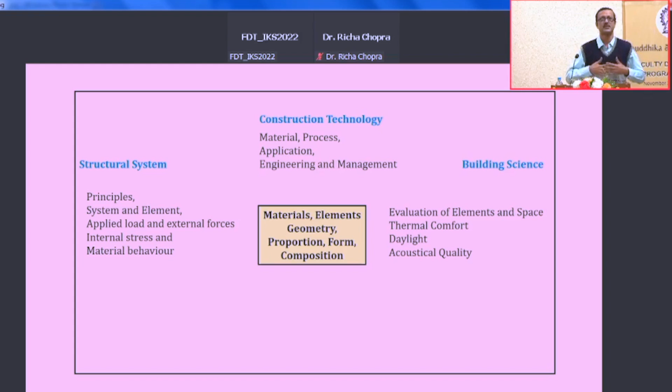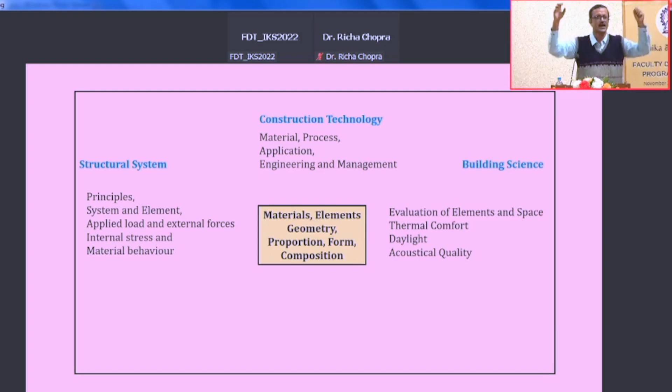It's a big temple, so there is a huge footfall, so you have to take care of the crowd, so you have to have larger openings, and how the stone can rest on those larger openings. So all of this comes under the part of structural systems.

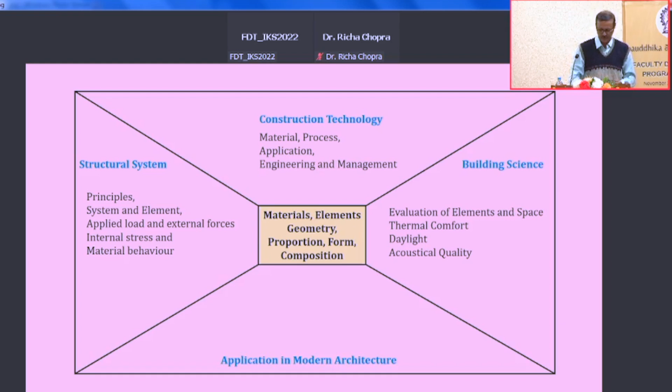What we see today, if you derive it, is just some kind of a derivative of that, a lesson from the past. Of course, there are a lot of things we have imparted into it. There are some new materials that have come into the picture. They are questionable.

Because nowadays, in recent times, around 10 years or so, we are talking about carbon free and sustainability, because we have hampered things in the last 150 years or so. After the industrial revolution, we exploited things in such a way, and of course there is population pressure and all. But due to that, there was suddenly a need to again go back to the future.

And the future is, go back to the past, sorry. And this future will actually, what I feel, is going to evolve with whatever we have generated in our past.

Of course, Government of India has recently initiated some good schemes, which Professor Joyson has just now told. We are in a middle phase of implementing bamboo as a building material in this area, where the northeast and this part of Bengal, and maybe Odisha, where bamboo is very, very available. So how can we use bamboo for materials, that is what we are doing.

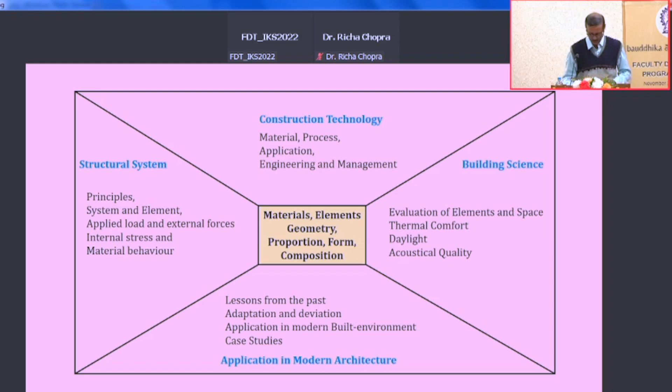So I just now told that there is the material, it has a process, it has the application. With this particular triangle, we have to actually go with the engineering and management. But what I will actually deal with today is these four segments of the Indian Knowledge System in construction practice, the Nirman. And these four are the applicable areas.

Probably I can think of this as a kind of thought area, or the thinkers that actually guide us in a particular way. One is material sensitive construction, how they actually use the material for construction, and the best material is used for the best purpose.

That is the sustainability. Next one is structure sensitive construction, that when I evolve a new type of building to construct, or any kind of object to construct, I have to think about how this structure can be held.

Climate sensitive, it is always there. When the human being entered into a cave, the home is a cave. It is climate sensitive, particularly, and also protection from the wild animals. So this is the very first one, I should actually write it as maybe the first, but this is the very first one.

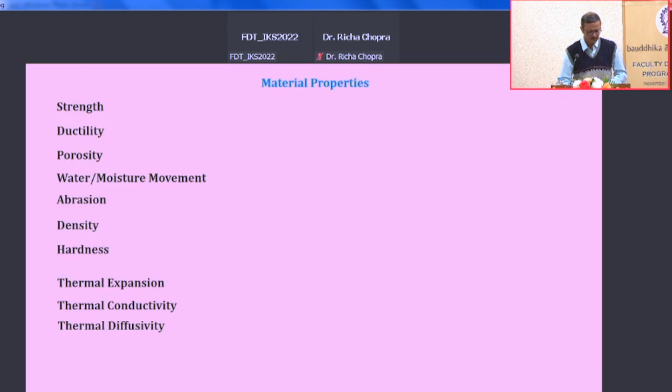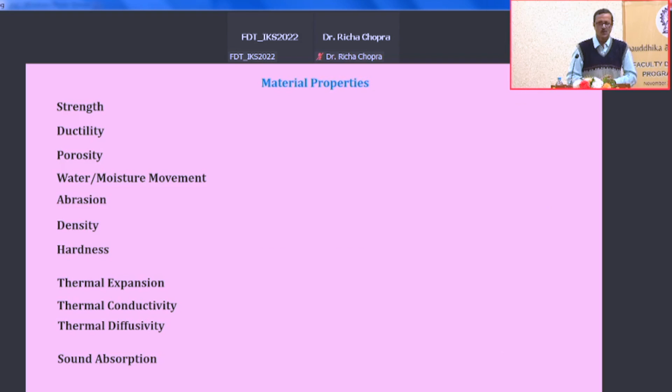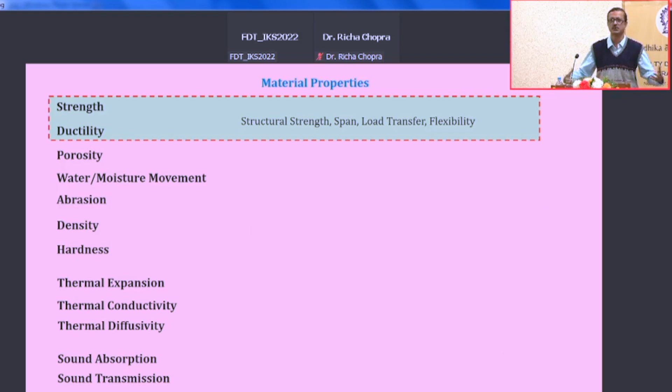These are the typical parameters that in modern times we say: what is the density of the material, what is the strength, tensile strength, and so on. These are actually taken care of in the domain, and we will see that strength and ductility have been used for the structure sensitive areas where there is a span, and a huge amount of loading and all. This porosity, water absorption, those actually factor into the durability, life cycle of materials, and maintenance point of view.

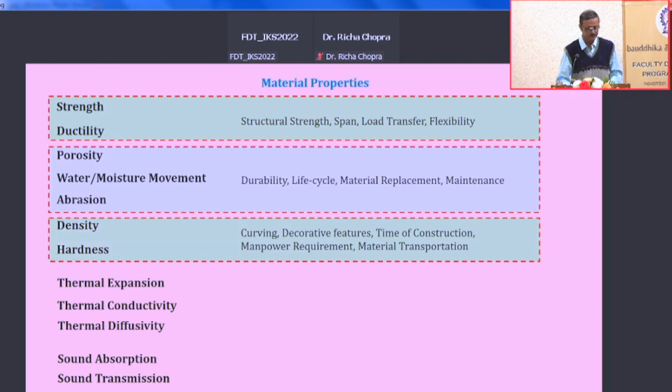The density and the hardness, if you see all the temple architecture, the carvings and all, they have chosen those kinds of stones from the density and hardness point of view.

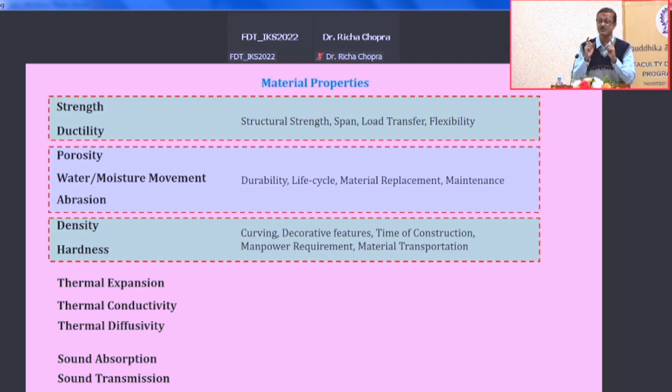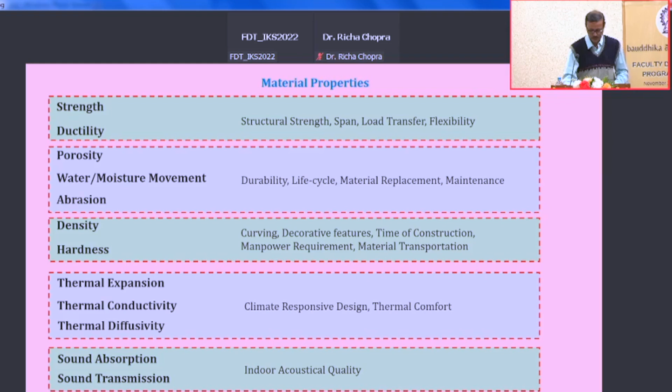From the point of view of the decorative features and also the time of construction, the total project time, manpower requirement, and those kinds of things. The thermal expansion, the thermal conductivity, etc. has taken care of the climate-sensitive part, and those include indoor acoustical quality. If you see the palaces of Rajputana, I mean Rajasthan and all, they have also imparted those kinds of properties, they have influence of those properties.

So in the Vedic period, if you see, in nutshell, in that particular era, the quality of the housing is the measure of the development. It was since then that we have actually imparted that the quality of housing is a measure of development.

There are a lot of Vedas, particularly the Atharva Veda, which actually gives some kind of insight. I must say I am still a learner, and this is a huge subject. The one biggest lack in me is that I do not know Sanskrit, because by virtue of my education I was not allowed to learn that particular subject. In my school days, there was no option to take that particular subject, so that is one of the biggest difficulties. But hopefully, with the things I am still learning, I can see what is taken there and bring that forward. So those are the signs, the Sthapatya Kala and all - those were still there.

Now if I see the housing character of the early Vedic period, basically it was started with a circular manner. The circular manner - why?

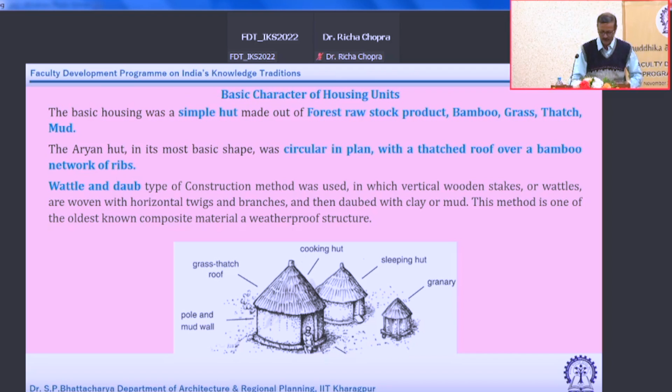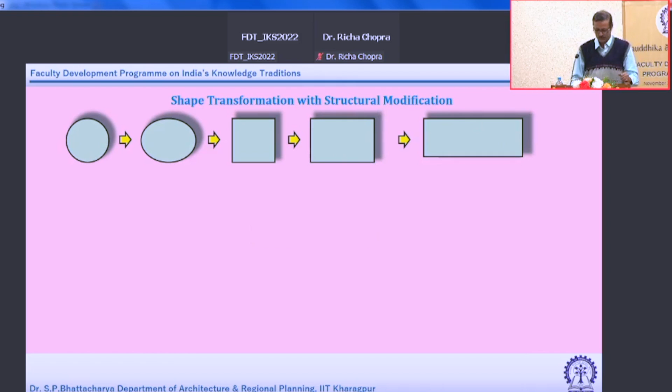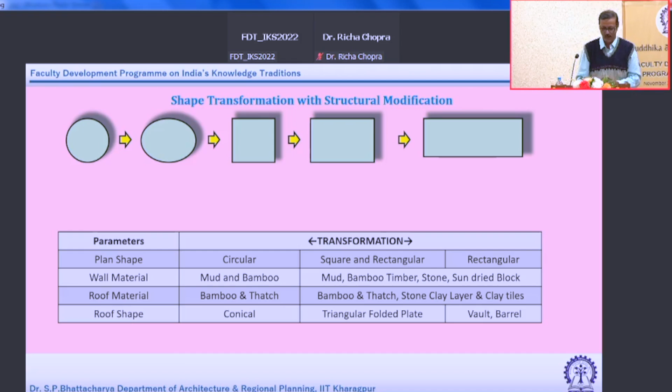They start with a circular plan, a circular plan with a conical shape with thatched bamboo and all, and then gradually they go for shape modification. So the circle has some disadvantage also from the internal point of view. Not only in India, if you go anywhere, go to the African civilizations and all, they started with a circle and then gradually compartmentalized the circle into different room forms and so on. The central portion is their kitchen or something like that.

So in India also it was gradually formed like that, and gradually it has come down to this kind of a shape - square, rectangle, and the deep rectangle. And by virtue of this, over time there were changes - instead of the conical or spherical roof, conical to spherical roof. Spherical, when it comes to a particular rectangular shape, has extended, making a kind of cylindrical roof.

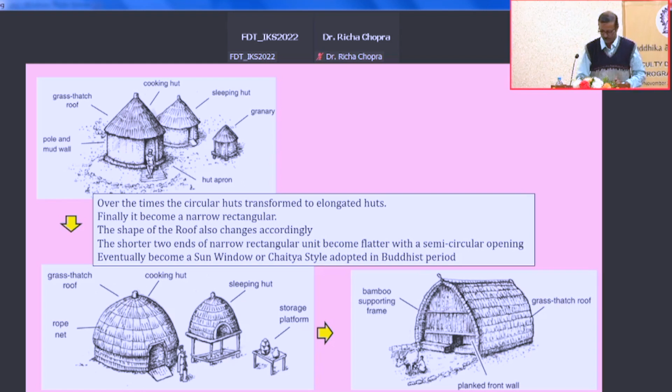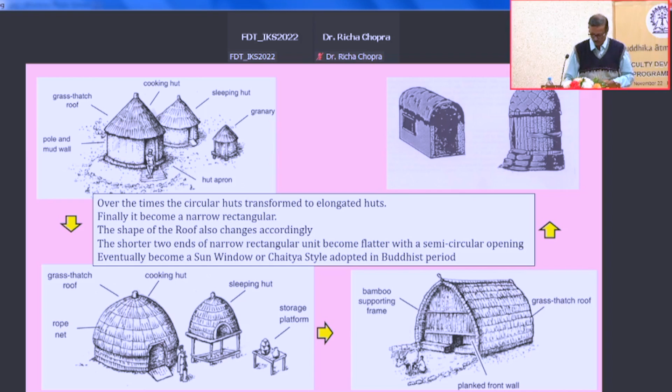This cylindrical kind of roof, when it was developed, can be seen as one of the creations of Buddhist architecture, where the Chaitya and all those things have been formed. So gradually it was developed like this.

From a building materials point of view, they mostly used mud and ribs or wooden things. Both are very climate and energy sensitive. Probably at that time they did not know about energy problems, or what concrete, reinforcement or plastic were, but people still use mud and it is a very good material. Of course, with mud I cannot construct a high-rise building, but in a particular kind of arena we can still exploit mud.

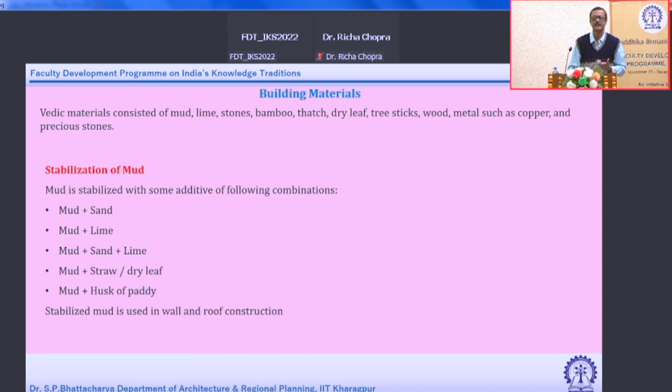Mud only requires some kind of stabilization. In those days they used sand, lime and sand, dry leaf, and husk of paddy as a stabilizer. They also used plastering material. If you see, it actually changes.

Suppose in the Vedic period, people are living in a particular society. The mukhiya of the society, and their houses, or the structure where they would come and discuss things, sometimes had a kind of plaster, and this plaster was found to be gypsum-based, that type of plaster was used at that time.

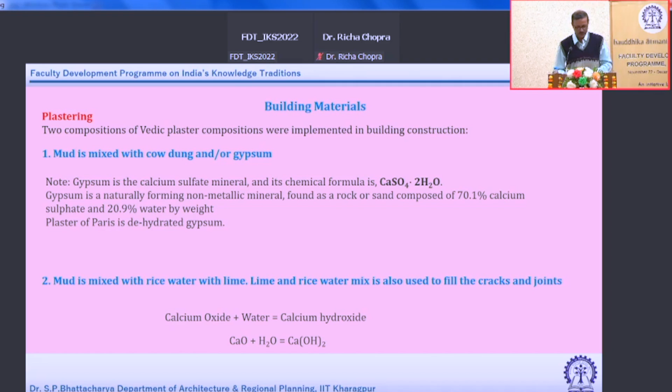They also used some kind of earthen blocks which were much more stabilized, and they used trifala as one type of additive that could give better bonding and those kinds of things.

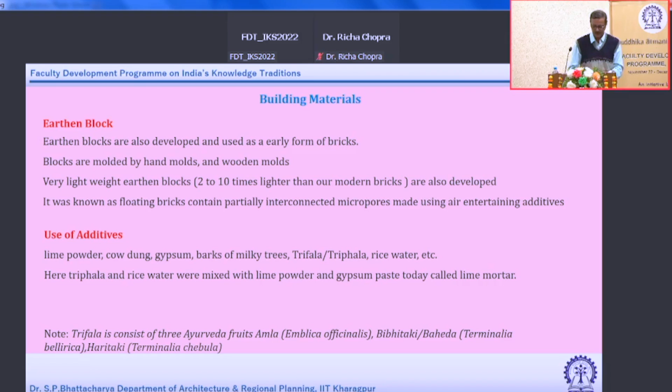This was transferred into the later period, which is more or less the Mauryan period, when timber came into play. When timber came into play, carpentry evolved, and due to this evolution of carpentry and the introduction of timber, the language of architecture also changed.

Whenever any new material comes, the construction people will recommend the material, and then the architect will start thinking how best to use that particular material for any purpose. So the language of architecture changes.

Suddenly they can think of using timber, going a little higher, having 2 floors or multi-floor kinds of things. Then as society grows into a bigger society, or a kingdom comes into the picture, they need some kind of secure arrangement, so they go for bastions, gates, and other structures requiring much stronger material. So instead of mud, they believe in stone and timber.

This particular effect of material we can still see in some vernacular architecture. Vernacular architecture means architecture that flows generation after generation, where no one with a degree in architecture or scientific knowledge of architecture is going to import a design; it's a particular hut that my forefather has constructed.

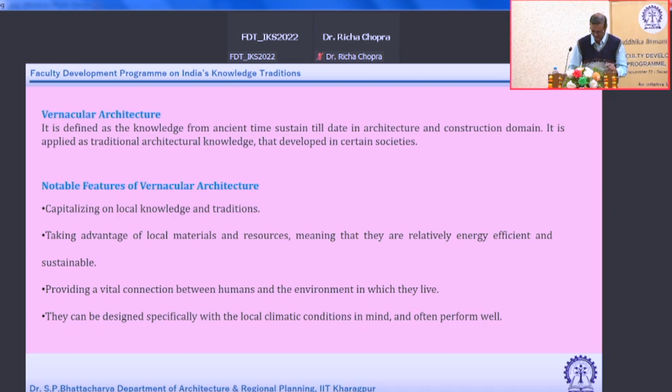Next, let us see some of the features of structure-sensitive construction. This is another very interesting area.

So we started observing that structure-sensitive events occurred from the Mauryan period, where stone and wooden things have been infused together, and houses and cities gradually began to be built.

When it actually transitions from small societal formation into urban formation, structure becomes important. Just as today we see high-rise buildings in urban areas but not in rural areas, when a society clubs together to form a city, to enhance resources we have to think of structure-sensitive material. That kind of thinking probably came in the Mauryan period, where they used to exploit that.

One of the things that was first developed is the pillars and the sculptures, which required stone. They need to know the hardness property and density property of the stone. If you take two different types like igneous stone and laterite stone, laterite may not give you that kind of benefit - it is very much brittle. Igneous stone may be very tough, so you may compromise with some sedimentary kind of stone which is a little soft. That means your total manpower requirement will be less and total time of construction will also be less, so within nice time you can do a lot of decorative features also.

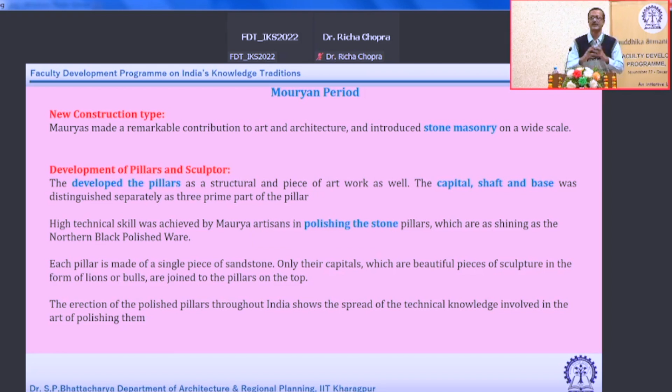So they used to do the capital, shaft, base, and develop gradually. This is a kind of pillar which has three distinguished parts: capital, shaft and base. It was everywhere. If you go to Greek architecture, Roman architecture, they have different orders and they developed - we say that was the Doric order, the Corinthian order, and the Ionic order, those three orders. These orders are initially about the proportion of the capital, base and shaft. It was developed in time of Ashoka and all - this was first initiated and then it was developed.

So these are the capital. These capitals are further distributed into different portions called animal features, which is lion and all, and then the sitting of the lion, that is the abacus, inverted lotus, and all those kind of things.

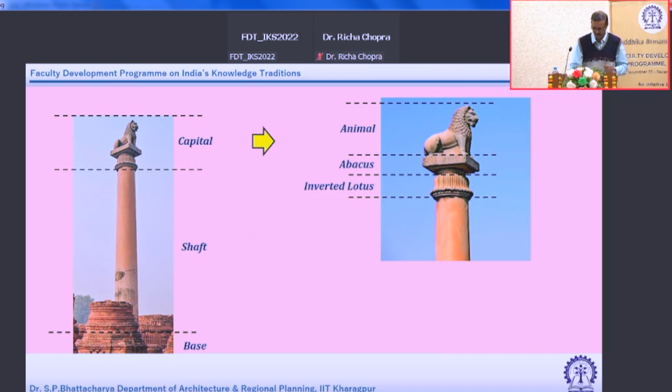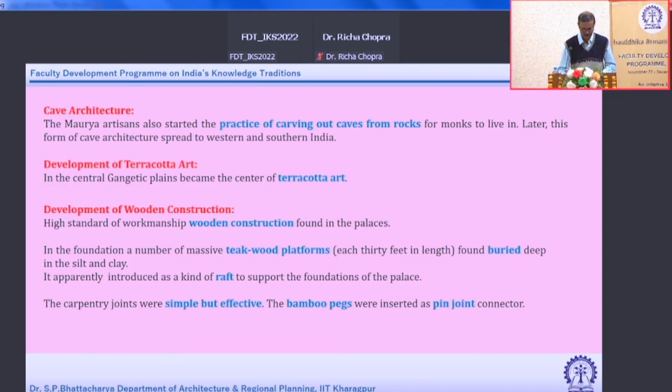The terracotta architecture came up - another new material invented - and the cave architecture was initiated at the time when Buddhism was flourishing. This is very interesting to me. At least I do not get much literature on this, but wooden architecture, as I told you, was also very much prominent in that area. The wooden architecture is mostly important for how the joineries were made from a structural point of view. The cave architecture or rock cut architecture.

In many parts - Bihar, Madhya Pradesh, Maharashtra - there are caves, ample examples of cave architecture. So it was a cave, and it was actually dug out, and they created those kinds of shells like Chaitya and Viharas. Chaityas are the prayer rooms and the Viharas are the monastery kind of thing.

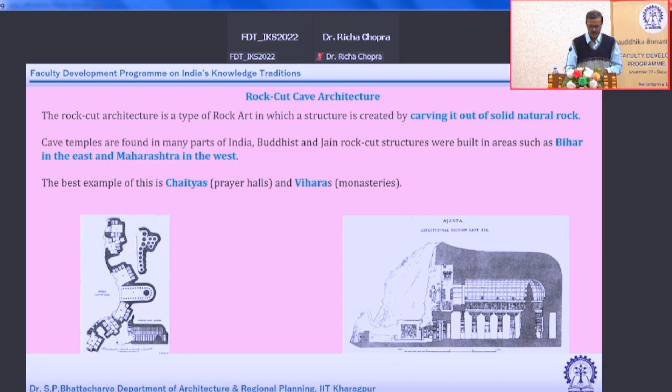Now you see this Chaitya and Viharas. You see this is cave architecture. On the right hand side is Ajanta - this is a particular cave, and a group of people dug the cave and created a particular void inside, which is actually some shells. The dimension of the shells, through the perimeter, and to have this particular supporting arrangement, they have those black peripheral columns.

Interestingly, I do not know what is inside this cave, I have some imagination, I am just doing it. It is not the construction we do today, it is additive construction. We do foundation first, then pillar, then the beam, then slab and then the walls. It's like a piece of butter or wax and I am taking out some kind of shape, and the final formation is something like that. It is reverse engineering - this is reverse engineering, and this engineering has plenty of scope to know about the actual sense of engineering in that time.

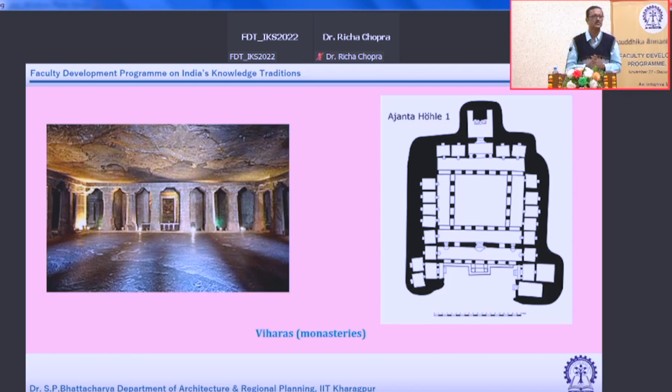If you see this one, this is again a Vihara, and you see they have - 1, 2, 3, 4, 5 - maybe 20, 25 pillars at regular intervals. The dimensions of the pillars are equal, the distance between pillar to pillars are almost equal, the edge leaving from the outer part of the hill or the cave - this is symmetrical. Absolutely amazing. If you tell me to do this with stone in an additive nature it is difficult, but reverse is much more difficult.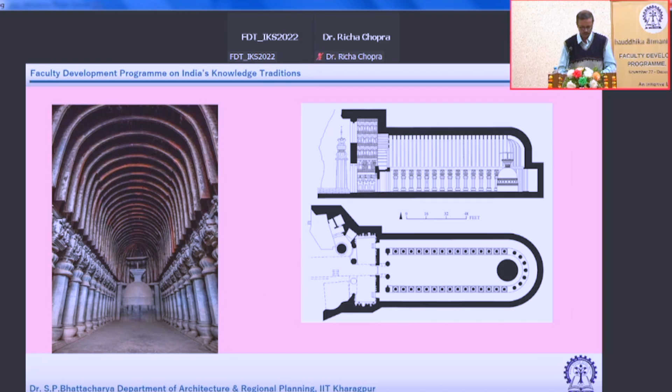So this engineering was actually evolved in our country, and there are some examples of this kind of cave architecture also in Egypt and also in some parts of West Asia, Jordan, but it is not that much elaborate. If you see the west coast of the Nile in Egypt, it is something like a chamber kind of thing where they put the mummy. There are some temples which are a little bit elaborate, but like this Buddhist architecture where the cave architecture was generated, it was just amazing. This is the reverse engineering we were very much expert on in those days.

I also learned that today what we do is that we take a site, suppose I have a 30 meter by 50 meter site, I need a kind of building. So as per the building bylaws, I leave some setback of 5 feet, 5 feet, 10 feet, 10 feet, and then I get the particular chunk of land, and then I do the additive things and finally design the building.

This is one way of practice. Now some schools of architecture in India have started a different practice, one that was actually formed in those days. They find out the center point of the mass, the center point of the land, and from there they evolve the circulation patterns and finally come down to a kind of boundary, which is negotiated with the present building bylaws boundary also.

So that is another way of teaching or learning building design, or Vastu design, evolving from the center - and what is embedded in our brain from our first class of architecture is that you take a site, cut the site at the periphery, put the first part, then the second part - maybe the back side has all the rubbish things - then go up and all. Not from the center outward like a flower. Both approaches can be read and judged; which is good and which is bad depends on the case. Sometimes our thinking is good, sometimes the other approach is good.

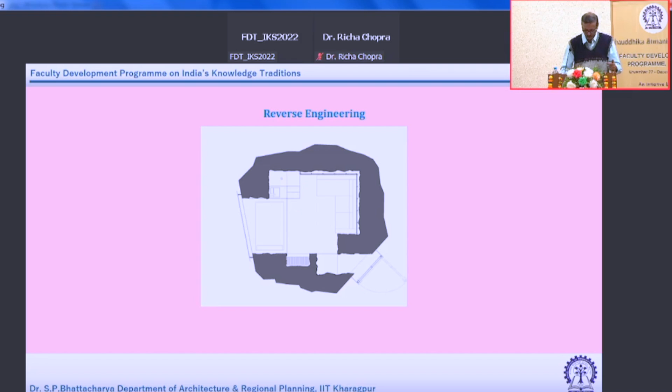So those are, as I told you, elaborated from the Kailash temple of Ellora, which is the best example of this reverse engineering in the field of the structure, sensitive to the case of Vastu, or maybe Nirman.

This was the second point. Let us go to the third arena - curved roofs. A curved roof has advantages over a flat roof. It gives you a larger opening size, and for the same span, you require less material. So a curved roof is always beneficial. This can be proven mathematically too, from the bending moment and other points of view.

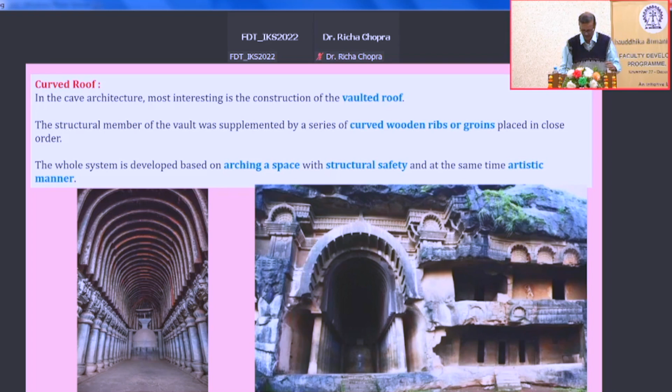Modern architecture also has a role to play here - we have the metro railway projects below the Ganga in Calcutta. That is one type of reverse engineering; we have to intervene with tunnel work. It is a kind of reverse engineering, but compared to Ellora, compared to the Chaityas, it's a crude form of that. If something happens, we just put plaster and make it look smooth, but it wasn't so in the case of those Elloras - there you have to make it smooth from the start.

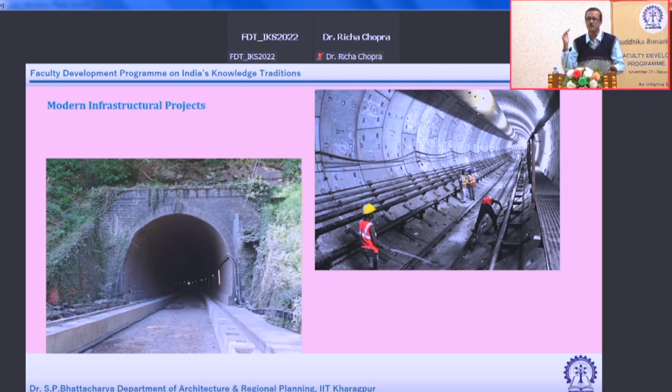So those were the different types of interventions made in Mauryan art - a kind of art that was developed, along with pottery and other skills. So during the Gupta period, temple architecture was gradually formed, and that is also very interesting.

So this is the Kankali Devi temple, said to be from the early Gupta period, some kind of early structure. This is the first form of the Indian temple as cited, which has only a square cell and the mandapa, nothing more.

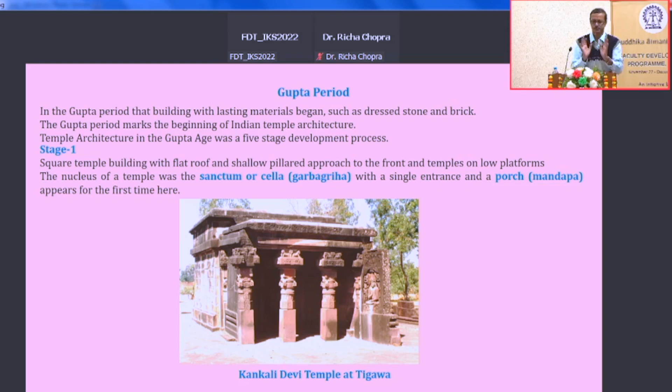Gradually, if you see, it has been raised - it had to be raised. Society wants the temple to be raised because it is the place of God, so the deity has to be at a higher level. If you go to Bengal, any Zamindar's house, someone who ruled a particular land for maybe 100 years or so, you see their house also has a high plinth. They stand at a particular high level and dictate to the people - do this, do that, don't touch this, don't do that, don't come to that. So that hierarchy in society was shown through the height of the plinth, that I am at a higher level. But here the temple has to be lifted up because the virtue of the deity is the highest - he or she guides us.

So the second, another very important thing seen here is that the ambulatory path has been described in this particular temple. Next, if you see, the shikhara has been developed.

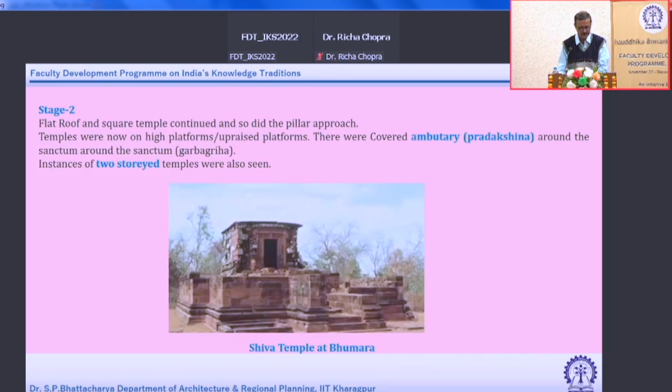The difference between this and this is that this is flat. They started the shikhara development. Shikhara development is one way the total height of the structure can be increased, and that becomes a kind of signature building in your place or area.

So gradually these changes formed, and whenever gradual changes occur, there is a challenge from new material, a challenge from the structure - how am I going to make the shikharas. So that thinking, that process was developed, and that was very interesting.

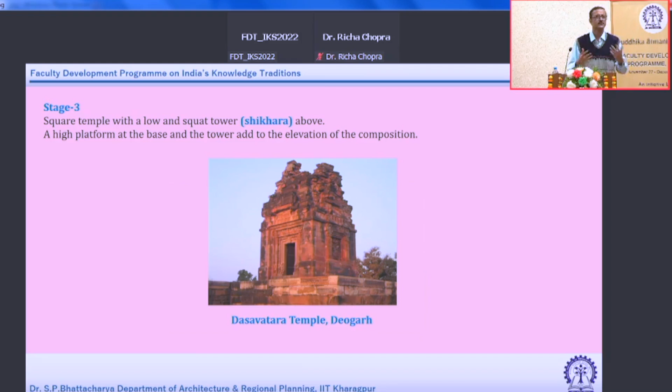And then maybe again the barrel kind of longer, rectangular kind of form - how can I fit into that longer kind of a thing - that can also be thought of.

Finally, this was one of the temples where this roof was afterwards erected; it was destroyed. The circle and how to make the dome - that was also their practice. It's very difficult to actually make a dome with stone kind of features in a circular form, so they practiced that and had success.

Gradually you see the flat roof become a triangular, pyramidical roof which is the shikhara, then they try the barrel vault, and then they try to create the dome. This kind of formation was seen throughout the Gupta period, and these were the test beds - not very prominent temple structures in India, but they were the test bed.

They start testing and then gradually come down to the fourth - climate sensitive architecture construction. Actually I should have put climate first, because climate was the first of all our concerns.

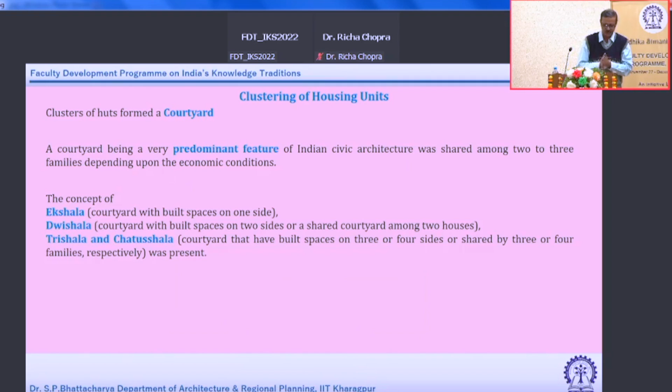So initially the prominent feature of Indian architecture was the courtyard architecture, called Ekshala, Dwishala, Trishala and Chatusshala. Chatusshala is the four quarters of buildings with an internal courtyard, which gives an incremental housing principle still in use - I have a small family, I have an Ekshala, then gradually a bigger family, so I can convert that into a Chatusshala kind of thing.

And as you all know, the central courtyard kind of structure is very prominent in India today, particularly in hot and humid climatic zones like Kerala and Bengal. In Bengal it has almost evolved away - people are not going into that now - but in Kerala there are still a lot of houses that follow this Chatusshala kind of character.

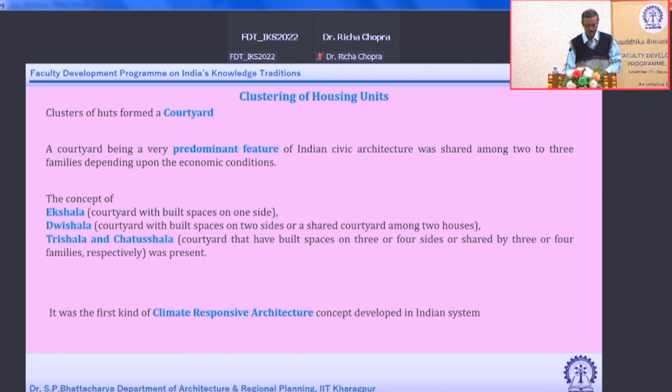If you see Bengal and Assam, as I told in the very beginning, mud housing - this material is one of the best from the climate responsive point of view for this particular area. You need a wall almost 300 mm thick, which is about 1 foot, and it gives wonderful protection from the heat. It maintains a constant temperature inside, in summer and winter alike.

The only problem - I must say all materials have some kind of problem. No material on earth is problem-free. Concrete has its own problem, steel has its own problem, timber also has its own problem. Unfortunately our engineers have always felt that mud is a very poor material that cannot be improved - material for poor people, for those who lived in villages, material for vernacular architecture, let them do their own - but it has its own problem.

The first problem is that in mud buildings the percentage of opening is very less, because for some reasons you cannot put large windows. In this hot and humid climate you require larger openings, but still it is less. That is why our studies find that mud buildings are very good at night, but if humidity is very high, it becomes a little bit bothering because the air exchange is not that much. Number two, as the opening size is less, daylight penetration inside the building is less.

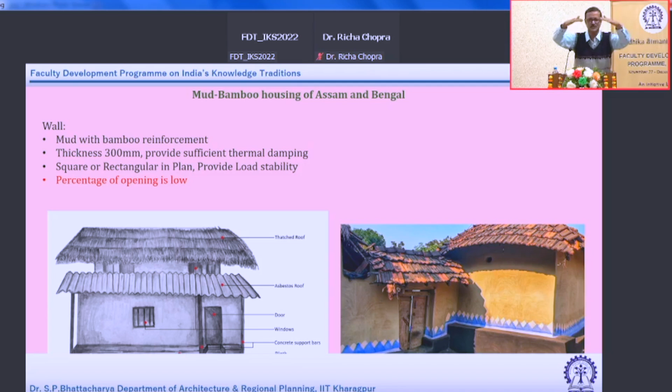The external long part of the shading and all these things also came as per invention. These are some mud houses we can see. Even there are double-storied mud houses seen. If you go around 12 kilometers from our campus, you will see a lot of double-storied mud houses still there, with a good character.

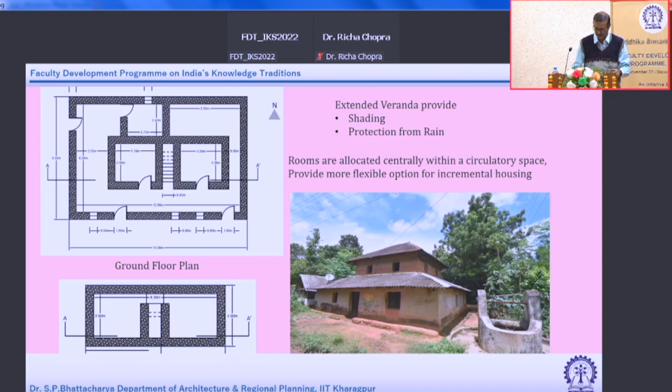Last week, a team from Hiroshima University came to IIT Kharagpur. We used to go and study that. They are very much excited to see it. Even they told that in Japan also they have mud houses, but they do not have double story, only single story kind of mud houses. So this is very interesting. We have not addressed this material properly.

The second is, if you go to the hilly areas of Himachal, again they do not have mud, so they use local material like slate or stone. In these areas of Himachal, the temperature is very low, so thermal damping is very high, and the thermal storage capacity is also fantastic in case of stone.

It actually stores a lot of heat because it has high thermal capacity, and it can be used at night time also. But there are still some problems. The opening is a problem we have not addressed yet. This particular masonry is very prone to collapse during earthquakes, and Himachal is one of the areas where there is a huge amount of earthquake activity.

Fortunately, after 1991 there was an earthquake in Himachal, known as the Uttarkashi earthquake, which caused a lot of damage. After that, the Government of India and scientific researchers from Roorkee IIT, which was not yet IIT Roorkee at that time, initiated some scientific interventions, retaining the stone as stone but making slight changes that would help during earthquakes. It's good to see that kind of thing has been made, but not a lot of research has been done.

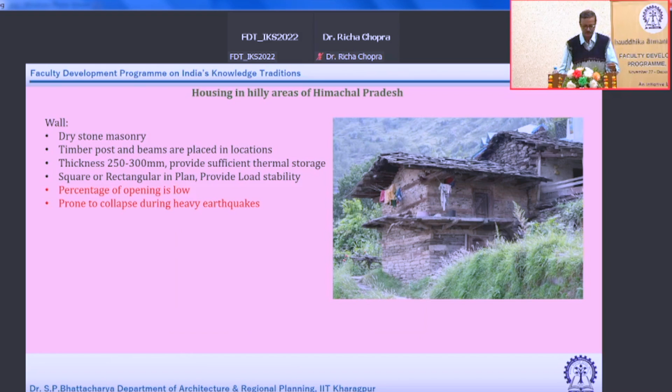Go to Rajasthan, there is another set of examples of climate responsive architecture. That is a hot and dry type of climate, not humid. So in that hot and dry climate, we do not require larger openings because we do not allow the air to come in, but we need shading.

Even from the society point of view, not just climate, they need some kind of parda, meaning there should be privacy. So privacy and shading come together and create a jali, the jharokas and all, where anybody can sit behind a jali and enjoy what is happening outside in a private manner. That jali also gives shading, protecting the person from direct solar gain, which is very tough or tedious in those areas.

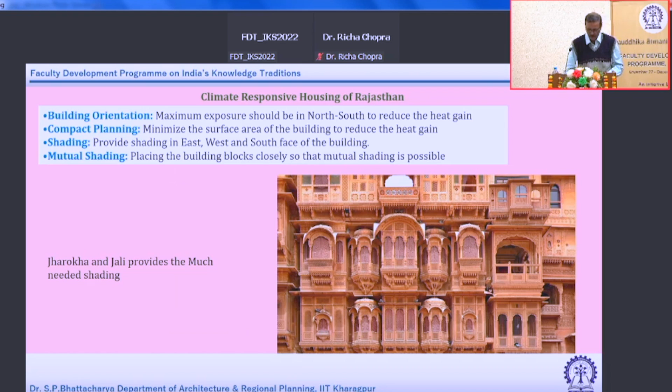There is jali also. If you see in the Mughal times, a lot of jalis were used, and that was actually taken down to the Rajputanas and all. So those are the typical characteristics of the hot and dry climatic zone.

And if you see this jali, one thing is that jalis are very intricate and decorative. We see pictures, people take selfies with it as background, because it is very decorative. This particular one is the Mughal jali, very decorated. That is one part of the story. The second part is that the jali was made of stone, and stone has high thermal mass.

So if the air passes through the stone, there is contact between the stone and the hot air, so there is a high chance of thermal interchange. I want a higher amount of time for the air to contact the stone, because if the contact duration between the passing air and the stone is increased, the heat exchange will also increase.

So what will happen? The hot air will become a little cooler, maybe 1 degree, 1.5 degree, or 0.75 degree cooler. That is significant from the cooling point of view.

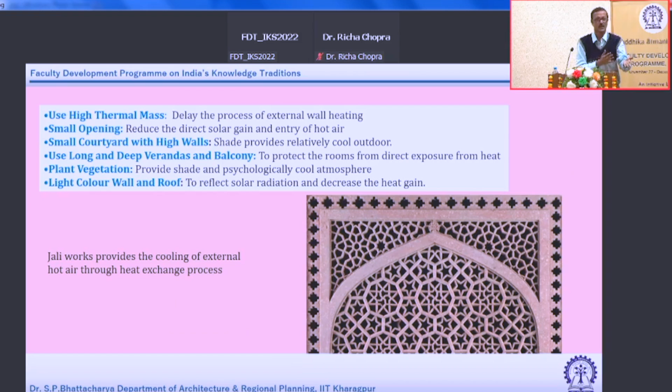Now, when you consider which type of stones—whether it is sandstone or marble stone—that has to be chosen from the material point of view. So these are some examples of the climate responsive housing of Kerala.

If you go to Kerala, you will see an entirely different typology. They have maximum exposure in the north and south to reduce heat gain. They want to capture the wind because it is hot and humid, very sweaty. Air blowing through gives some relief through evaporative cooling. The openings are segregated, the plan is not very dense, and large courtyards are very important.

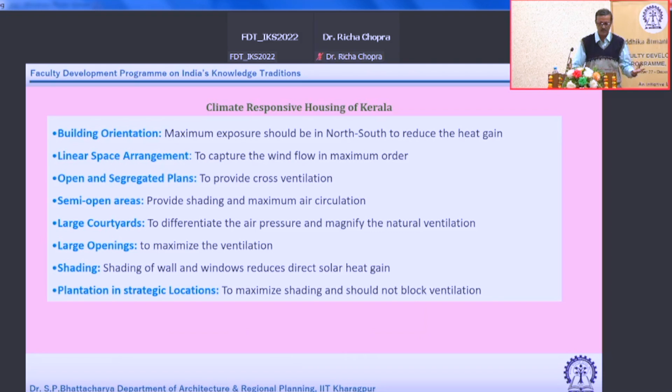This particular building is the Chittor Palace, which is very near Cochin. It's a small, decent, cute looking palace where kings would go and sit. See the veranda, the top veranda, the top part at the first floor veranda.

You see the design of the window. Maximum opening has been kept. In the wooden window, there is a hinge, and the hinge comes and flushes with a central stick. That is called a mullion, the central stick, and the panel comes and is placed directly over it.

Here that mullion is also removed, the central piece is vanished. The two leaves will come together and join. So the mullion would otherwise provide some kind of barrier to the wind. If you remove the mullions, there is much more airflow and much more visibility.

In front of this particular window there is a huge lake, so there is ample evaporative cooling potential.

You see the picture below. On the right hand side, there are some windows after this shaded long corridor, and that window also has larger openings, meaning very little interference, so they allow the wind through. So ventilation is one of the major characteristics in the architecture of Kerala, which is climate sensitive from the warm and humid point of view.

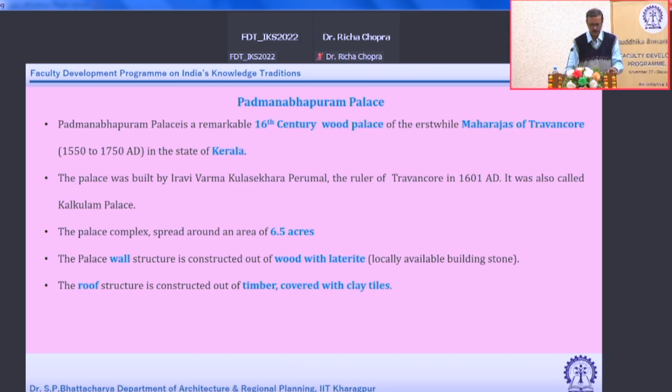The Maharaja of Travancore constructed a palace called Padmanabhapuram Palace. It is around 50 kilometers south of Trivandrum, and after another 10 kilometers is Tamil Nadu, then the last tip, Kanyakumari. This wooden palace is worth seeing, in Kerala, which has different shells and different character.

Architecturally marvelous, because if you see the actual palace, there are different reception halls, living quarters, dining areas, kitchenette and all. But the most important part is that it's the best utilized way a climate sensitive architecture could have been, erected in. The most prominent material is wood. I don't have the photograph, but it's very much available on the internet. We used to visit this particular palace with our students in 2017.

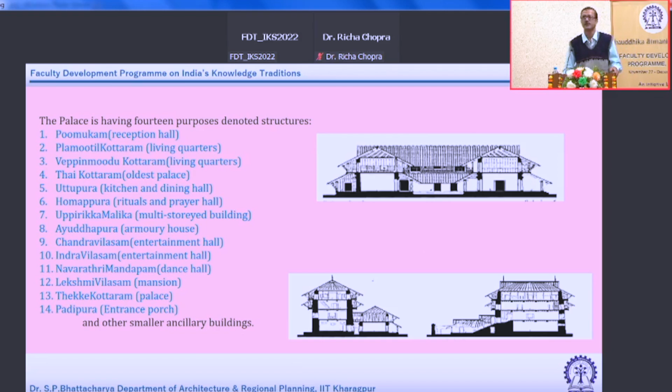The last part of my lecture is the activity sensitive construction. We talked about material sensitive, structure sensitive, climate sensitive, now let us talk about the activity sensitive construction. Let us first talk about, in Jammu Kashmir, the Dhajji Dewari.

This particular Dhajji Dewari construction is a vernacular construction. No engineers have been intervening in that. Probably in the last 20 years or so, after this earthquake became a mega kind of event, we go and see what that is. This type of construction is wood and stone mixed construction. The wall panels are made by the diagonality of wood, and those triangular open spaces are filled with stones, larger stones and smaller stones. This masonry is called Dhajji Dewari, and it is one of the best masonry seen to protect from seismic activity.

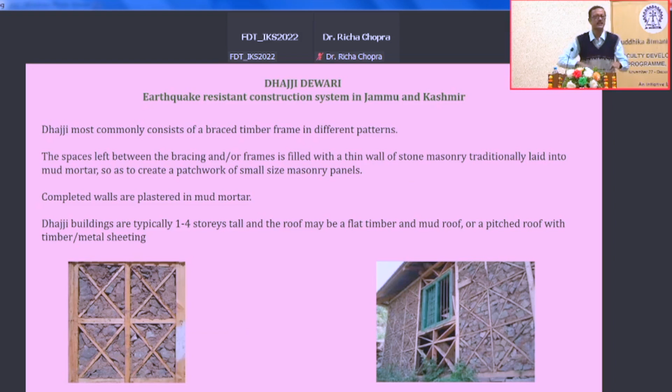The thing is, when these diagonals are made by wood, it is a material which absorbs a lot of shock. It acts as a shock absorber, and a diagonal pattern will actually behave as a better shock absorber, because you don't know from which direction the earthquake will come. It depends upon where the epicenter is. So it may come like this, or it may not be in the orthogonal direction of the building, it may come another way. So you need multiple lines of defense. In a panel, multiple lines of defense may be created by the diagonals, or further bifurcation of those diagonals.

So these wooden diagonals actually act as a shock absorber, and then it is filled with stones, and it is a dry masonry. You may say that dry masonry will be prone to collapse, which we have seen in the Himachal building. But there, from bottom to top, it is full dry masonry, so if you shake it, it will collapse.

But here, what will happen is it is actually embedded or encircled by a triangular arrangement of small pieces. So after some kind of shaking or vibration, first this dry masonry will rearrange itself, and by virtue of that rearrangement, some energy is absorbed. Even though it will fail locally, by virtue of this triangular part only, that failure will not lead to the failure of the next neighboring triangle, if that triangle has the scope and the orientation of stones is different. So it is not going to give you a progressive collapse. It may give you a local collapse, small damages, definitely damages, but those damages will be arrested and bounded by the wood. This shows how intelligently they constructed this building, leading to an understanding of how to stop the progressive collapse of a building during an earthquake, which is very essential nowadays.

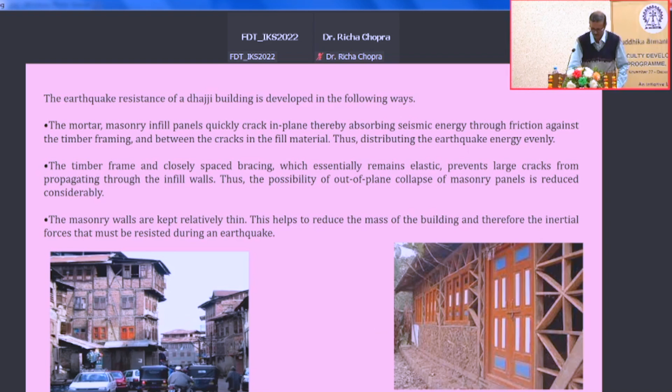Very interesting. Number one, the shape of the building is either conical, circular, or spherical. These houses are also a little bit lifted, like we do in flood-prone areas where we lift our house.

Why circular? Because this area is prone to cyclones. When cyclone wind blows against a perfectly rectangular shape, the force is intensity into the full area, so intensity into area. But with a circular wall, the intensity affects only a strip area while the rest is tangential, so the wind slips past. The total thrust accumulated on a circular building is much smaller than on a rectangular or any straight-edged building.

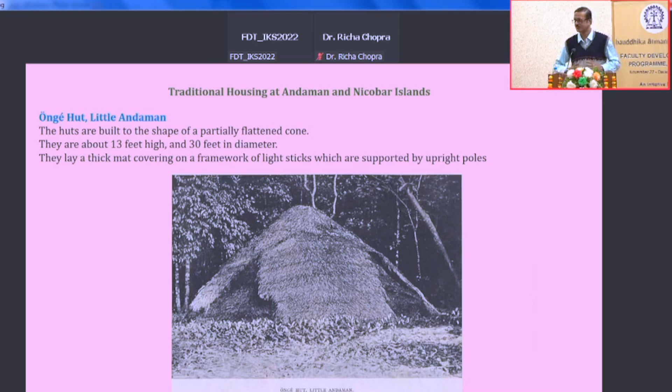It is very easy to topple me because my center of gravity is high, since I am a tall man. But a small, hard-built man is very difficult to topple because his center of gravity is low. So this pattern, circular shape, low center of gravity, fluid mechanics, all of this is vernacular architecture, where there were definitely failures in their lives too. When they constructed and watched failures, they rebuilt their houses differently and finally arrived at certain conclusions.

I think that's all from my side. I have addressed four types of construction technology activity. Any questions, any discussion? I may not be able to answer everything, but I am very happy to discuss this.

They actually had to create an incline to get it up there. So how did that construction happen, if you are aware? I do not know this, but please sit down.

This kind of lifting of a heavy stone to a certain height is very interesting. Suppose this is an empty ground, and this heavy stone has to be placed at a certain point whose coordinate is some height above. So you cannot do it without some method.

Particularly after building the walls, they usually do ramping, a ramp made up of sand and earth fill. Suppose this is the edge of the temple already, so I make a ramp like this, like this, and as I go to the top, the diameter of the ramp gets smaller because of the shikharas. You travel up this ramp and then place the crown stone at the top. That was the practice.

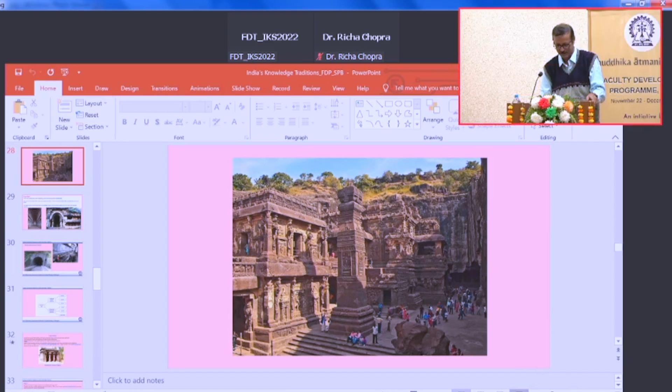Okay, so you talked about this 5 tons per hour. See, it's 5 tons per hour, but that doesn't mean that I will do 5 tons today in one hour and then the next hour another 5 tons. If you take a bird's eye view from the top and see the temple, there is a lot of open space, and there are some interim spaces, which is the case with the Kailash temple also. So there were 2 or 3 types of manpower which were involved.

As I understand from some of the literature, the construction process literature of this particular temple, I am still finding—I didn't know, but I told you that maybe they are somewhere, and I know they are somewhere, but I haven't yet had the chance to read them. But there are three types of people or manpower who were involved in this, and this particular stone, suppose if you take this particular—maybe

if you see this particular part, it is fully empty. So the human resources were asked to cut this particular rock piece and take it out. It may not be cut totally, so it's slicing—take it out. It may not take that much time because it doesn't require that much accuracy and all that. So this particular part will be lifted out, and as and when it's lifted out, maybe in a particular day you may lift out maybe 200 tons of material. So the majority of the total excavation was done maybe within 6 or 7 or 8 years out of the 20 years or whatever the largest span.

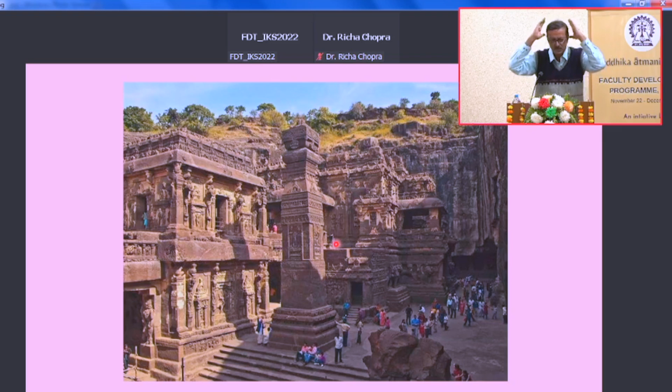So whenever you dig, and definitely it is something—today also in our metro railway projects, how many times do we change the plan because of some intervention, something like this and that. Similarly, after the whole excavation has been done, probably they then thought about what should be the different approach routes and what are the different shells and whatever. So then the second layer of architecture came into play, when the second part of the people, who are not that strong in build but are very good in carvings and all, were employed as manpower and did the finishing kind of work also.

So I feel it is two different ball games altogether. First, 6 to 7 years of total excavation, creating a kind of local map, and then gradually going into the finer decorative part or whatever.

Yes, sir, you are. Please sit down.

Wall thickness is about 1.5 to 2 feet. The building was still there, constructed during my study. This collapsed around 5-6 years ago.

So, are we compromising on the quality? Yes. Are we cutting the cost? We are compromising with the quality, we are cutting the cost, we are compromising with everything.

It is a very good question. In 2011 I joined, and from 2013 to 2016, for 3 years, I was the vice chairman of the construction division of IIT Kharagpur. So we have interacted with a lot of contractors for a lot of building construction and all.